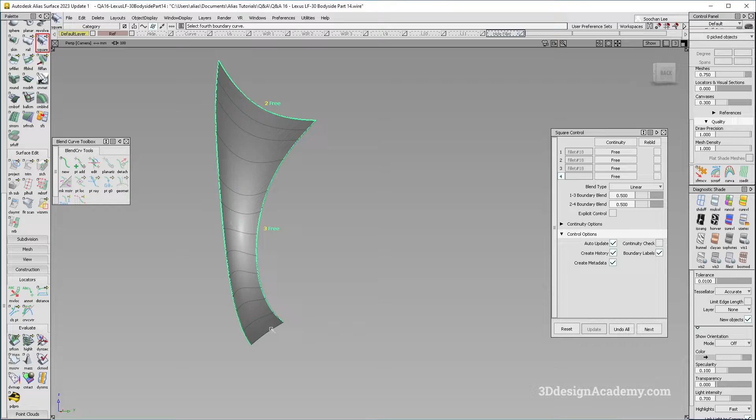Let me show you why. I'm going to try to rebuild this because there's a little bit of zigzag, not quite a twist. Let me reset the tool. I'm going to rebuild with a square, and set 1 to curvature and 3 to curvature as well. You see the CV structure looks like that.

Now, the bigger problem is that in order to clean this up it's going to take a lot of work, and I'll have to manually pull them, which is not ideal. To be honest, a boundary blend, as you can see here, doesn't really help either - it's a pain. Unfortunately, bi-rail doesn't really do much either.

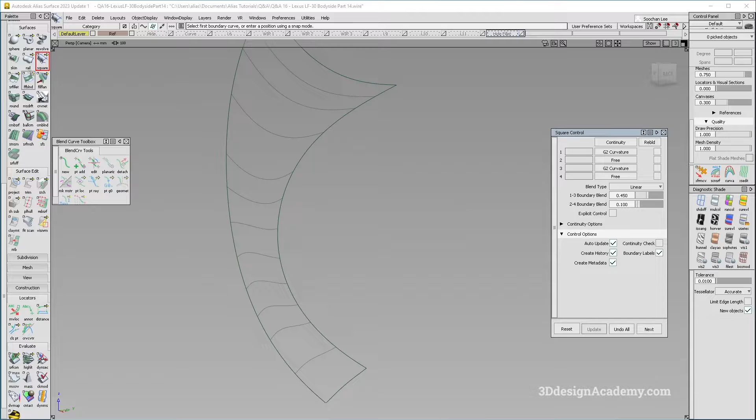If I do a bi-rail, it should be a little bit better. It looks good now, but once I put curvature in here, you'll see that it spreads like this. This is probably the best out of all of them, but it's still not ideal.

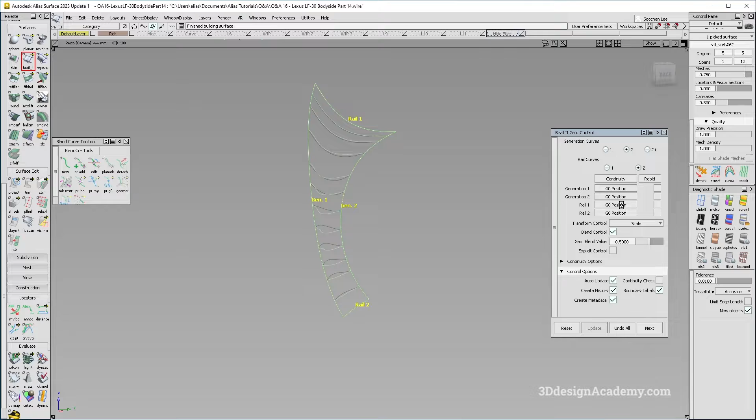Same thing over here. If I pick those as a Gen, I'm going to say Gen 1 is curvature, Gen 2 is curvature, and it looks like this, which isn't exactly ideal.

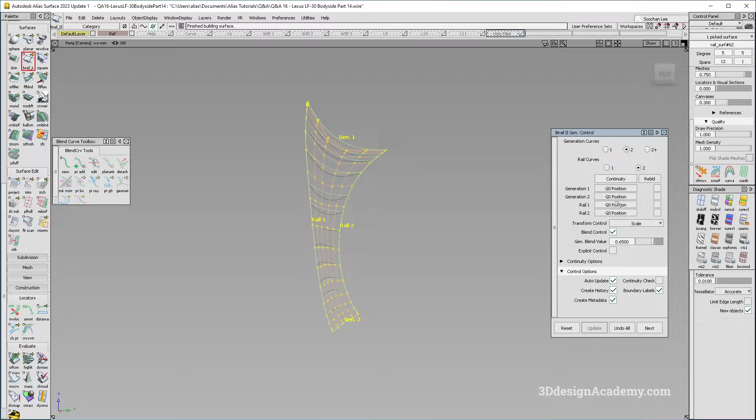Let me see if I can use the gen. blend value to see if it gives me something a little bit better. I'm going to set the rails to curvature and see... nope. Okay, so unfortunately it looks like I'm going to have to use...

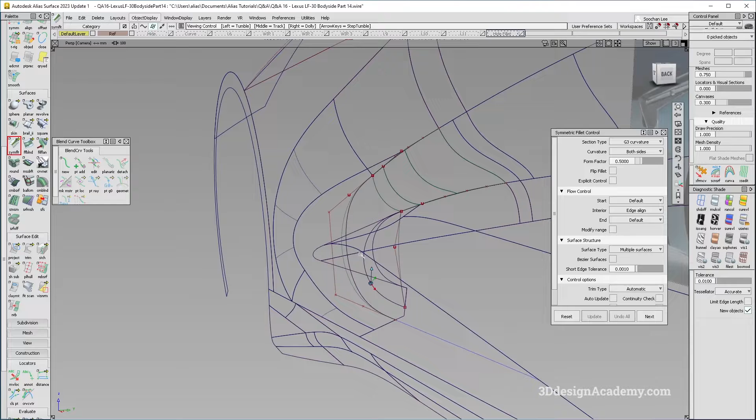So let's do this: I'm going to set this to curvature on both sides, form factor will be 0.5, and I'm going to set everything to default and free like this. I'm going to pick this COS over here and do this one.

Now the problem with this one is, of course, it looks like that, and this doesn't really look good either. Unfortunately, I don't think Bezier is going to work well - it's way too many pieces.

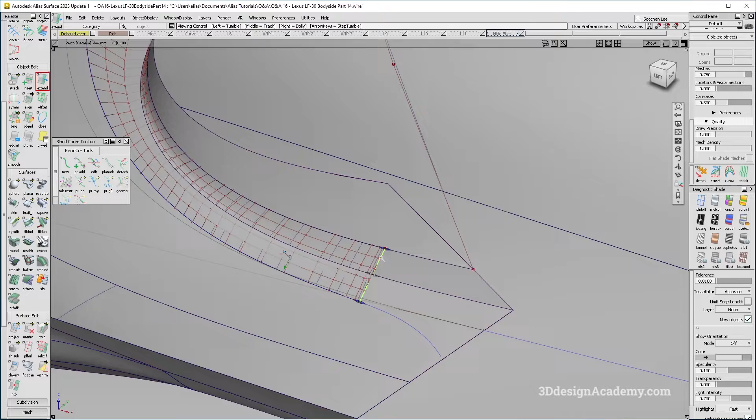So here's what I'm going to do: first I'm going to extend this back, because right now you'll see it's actually going a little bit the weird way. I'll extend that back a little bit, and probably extend this one back a little bit too.

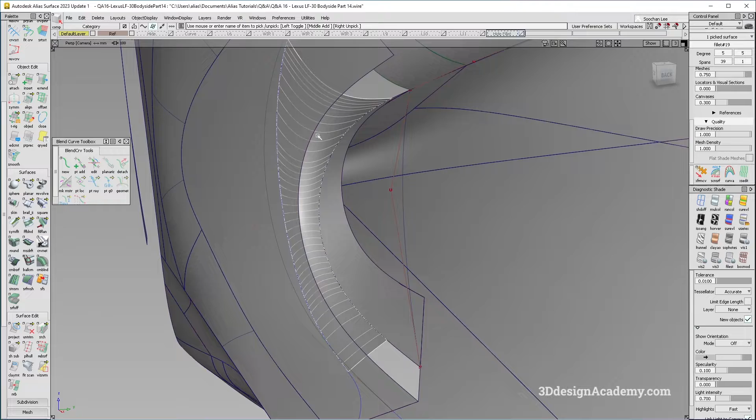Let's see if I can just reduce the number of CVs and number of spans, because right now I think the shape is really good - the only problem is it's just got way too many CVs and way too many spans. Let's see if I can reduce it a little bit.

I'm going to say align, and let's see - obviously position influence twists it. So I'm going to try to reduce the number of spans just this way. Actually, let's do the same thing over here, like this, so that I can do them at the same time.

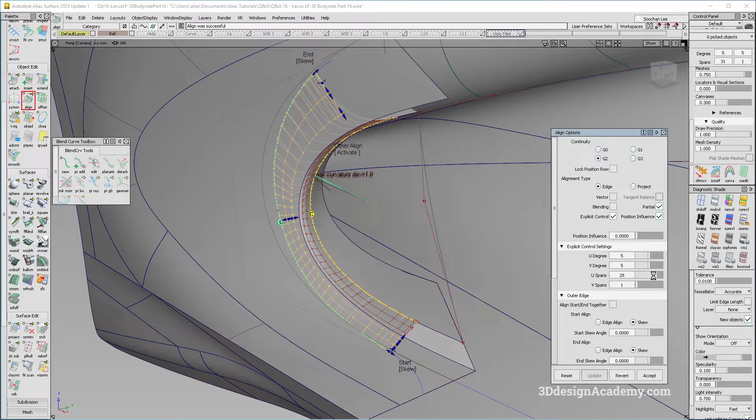Without position influence, I'm going to try to reduce it as much as possible without causing too many problems. Right now I have 21 spans and it's starting to fail position, so I'm going to see if I can just do project instead. There we go, that looks good - so right now I have 21, and it looks like the other side is also failing.

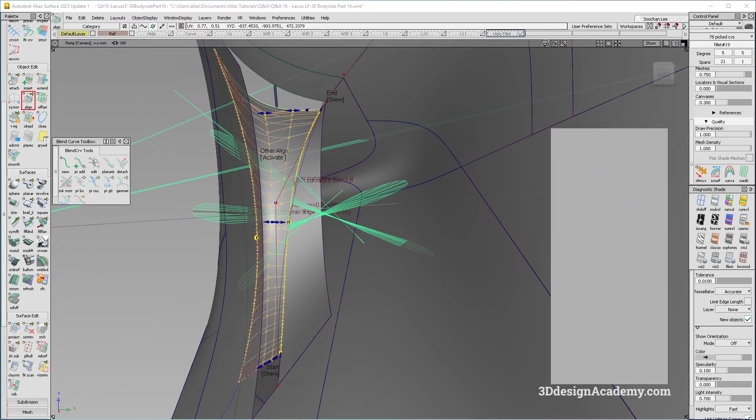Let's see if I can do this one as well. I'm going to say project - is it actually failing position? Let me try normal... oh, Y is no good. Actually, I think normal might be best. Okay.

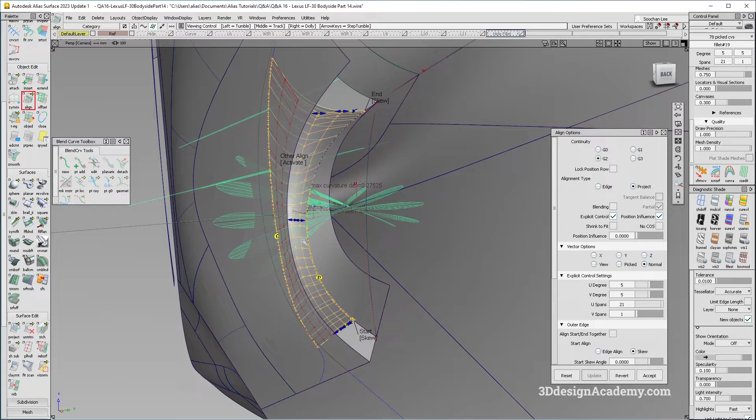Let's see, is it actually failing? I'm going to check. I'm just going to untrim over here and check the continuity. Okay, so it looks like it is failing. I was hoping to reduce it a little bit more, so let's see if I can. What I'm going to do is just reduce it a little bit more. 18 - it's failing, that's unfortunate. Okay, so I would say 10.

Maybe what I could try to do is just reduce the amount of patches over here. Or maybe... okay, so at least this part isn't failing. So let's see, 10, 11, and I'm going to see if I can just align this one.

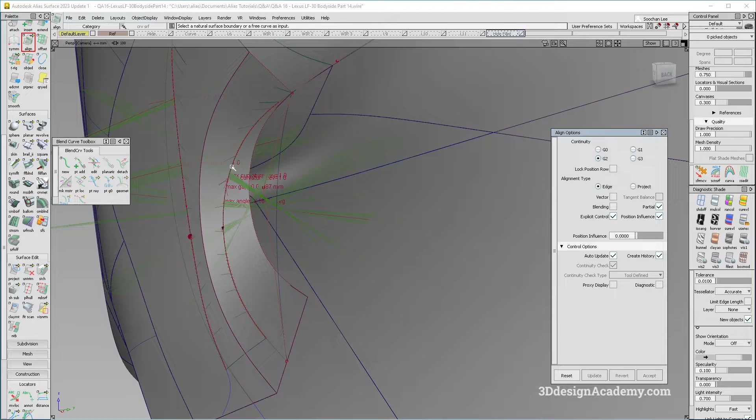What I'm going to do is just say edge over here. Let's take a look. I'm going to grab this one over here. Let's say align. Well, first of all, let's just delete the construction history over here.

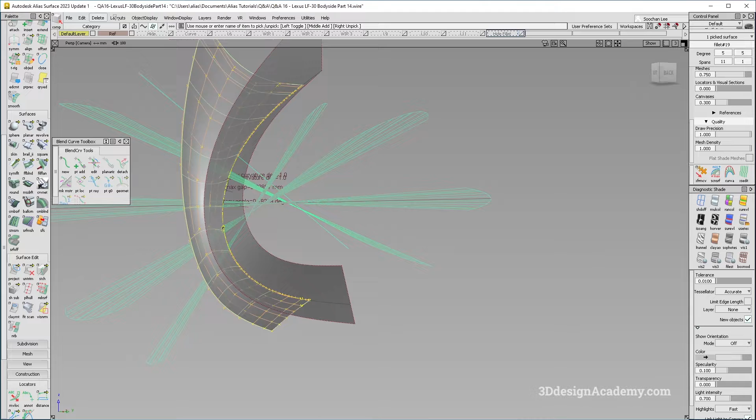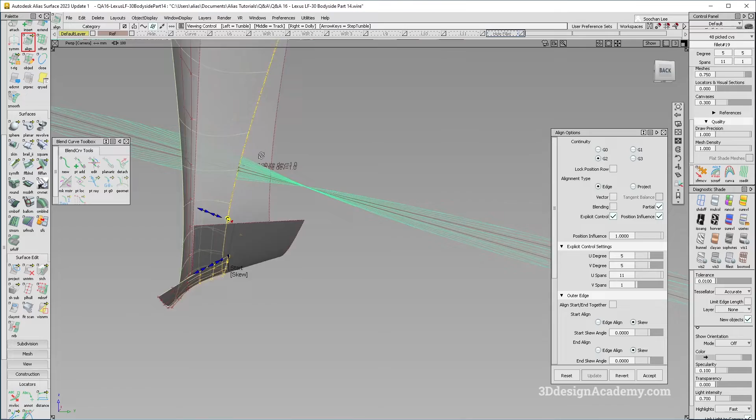I'm just going to align to edge. Well, let's see, okay, so that one doesn't work. Position influence - oh, what do you know? Okay, so I was able to get a little bit something. Now, I did increase the position influence, but yeah, that's actually it. There wasn't a lot of movement, so I don't think I really need to rebuild it. The whole point of this is not to rebuild it because that just ruins the CV structure.

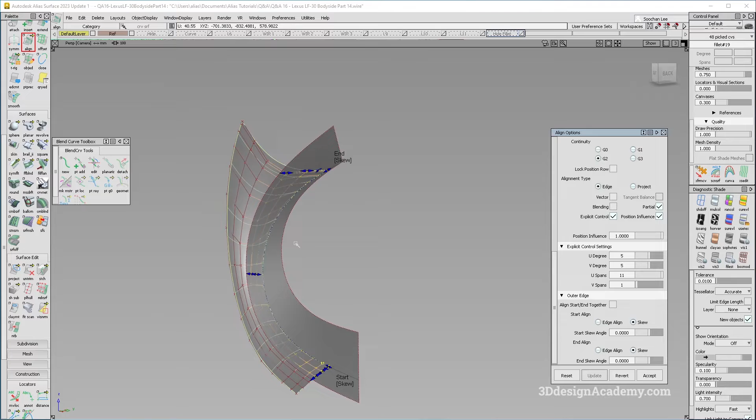So it looks like that worked out quite well. What I'm going to do is... actually the COS I'm going to leave for now. Actually, you know what, let's see. I'm going to do a revert and see if I can just revert to align to G1, and let's just check the continuity over here. Same thing, slight movement in the CV, but nothing major, which is actually perfect.

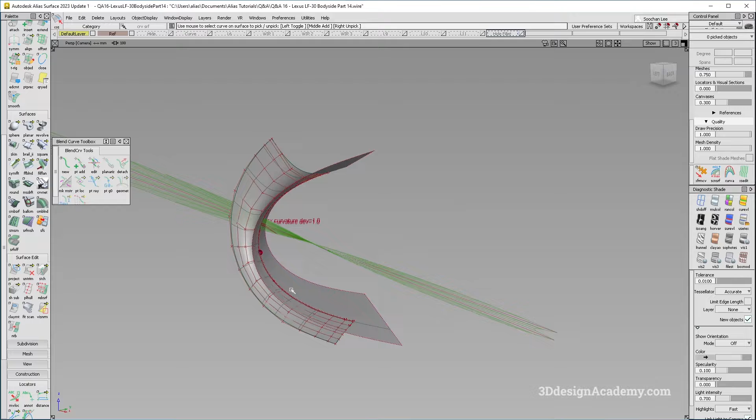Okay, so if that's the case, I'm just going to delete number 2 because I don't need that anymore. I'm just going to make everything visible over here, and everything's looking pretty good. Okay, so now comes the alignment over here. So first of all, this outside one I am actually going to delete, and let's continue with the top first because the bottom should be pretty easy. I think I should probably tackle the more difficult side first before doing anything.

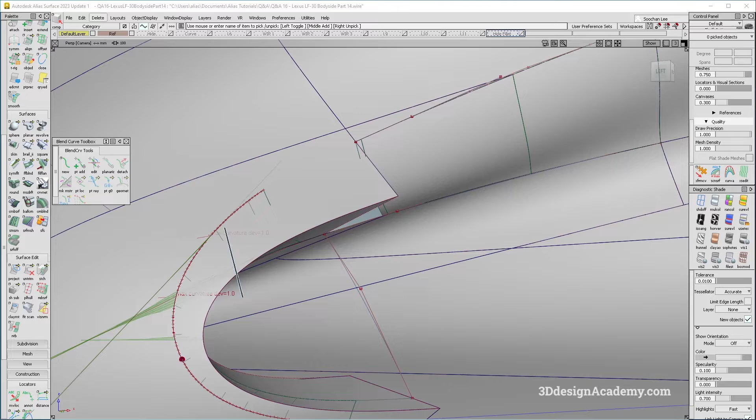So first of all, I believe this is just freeform blend, so let me just change this to default like this, and I'm going to see if the blend over here works well. What I'm going to do is just delete the construction history over here, and actually, you know what, I'll just put it there. I'm going to see if I can do a nice blend between this one. Actually, let's hide that too because I think I'm pretty much done with all the canvases.

Okay, so what I'm going to do is just grab a blend curve, and I'm going to align this one against this edge over here. That's not great, but it's not horrible either.

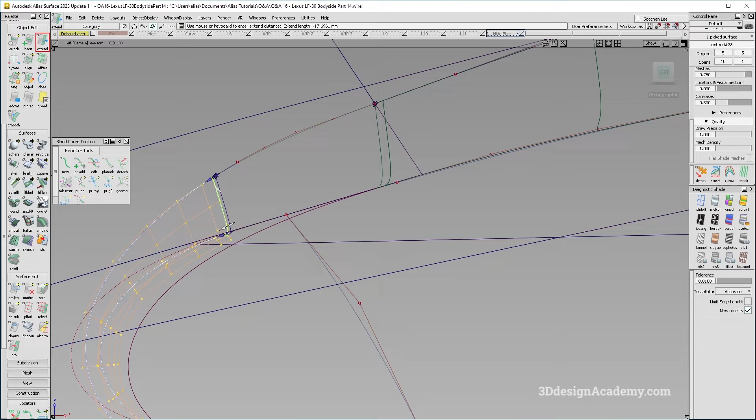I might just, you know what, just in case, I'm going to delete the construction history, copy and paste, delete the construction history so that I have an original. I'm just going to extend this one just a little bit like this so that the CV structure is a little bit more balanced. Since I'm doing that, I might also just get rid of one span. So now it should be a 10 span surface like that, and that's not too bad.

Okay, so let's continue on with this one over here. Since this piece is actually aligned like this, I think I'm just going to get rid of this over here. Actually, you know what, let's do this - freeform blend over here.

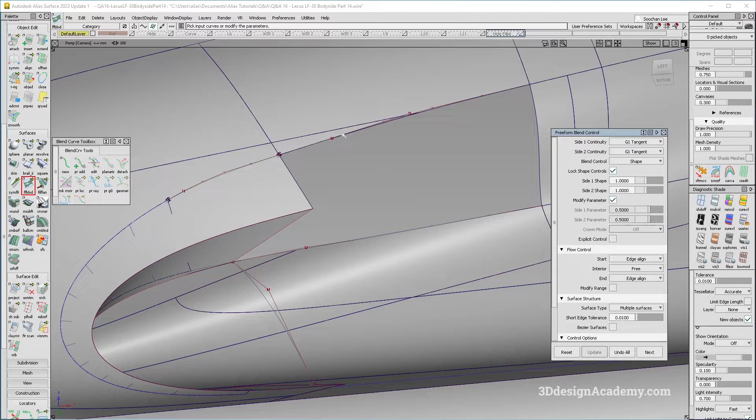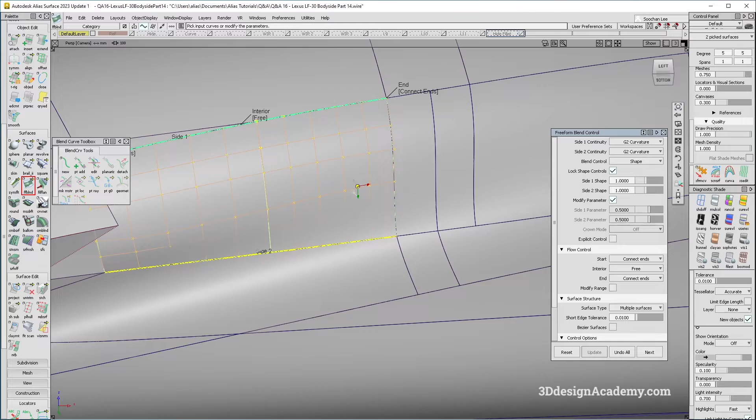So let me just hide all the curves because they're really in the way. I'm just going to hide it in this layer for now, and I'm going to do a freeform blend here and here. And it's going to not be edge align over here, but connect ends. Same thing over here, and of course those should be G2. Okay, so that's that over here.

Now, this is aligned to a fillet, which is actually kind of shrinking, so it might be a little bit ugly over here. Let's take a look - I mean, the highlight's good, but the problem is it's aligned to this one, which might not be ideal for a transition here. So let's take a look at this one.

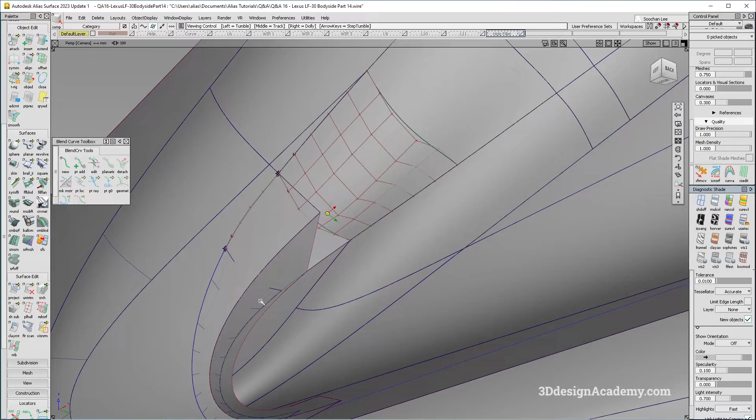Okay, so this piece over here requires 2 transitions over here. So what I'm going to do is, first of all, I'm just going to project this from Y like this. And let's go ahead and do a freeform blend from here to here, and I'm going to do one over here as well.

That one I'm going to say connect ends, and this one default. And that's giving me something like that, which isn't good. But that's okay, I'm just going to copy and paste this. The problem is the COS is reading all the way to here, and that's causing the issue.

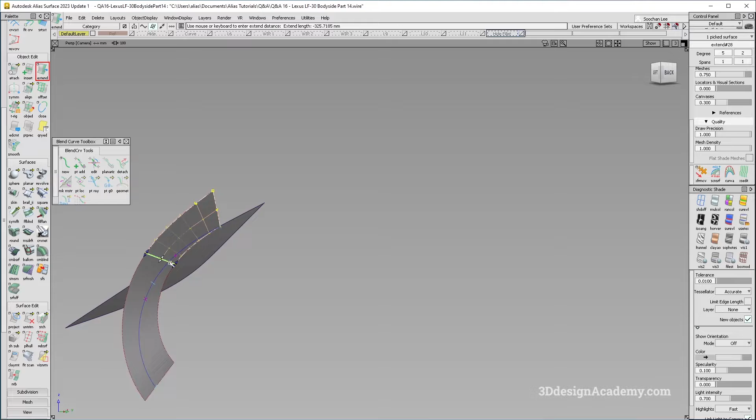So the Alias software doesn't really know where to end and where to start. What I can do is extend this back and use it as a helper surface to get the freeform blend to work a little better. I'm going to grab this edge over here and this one over here, and do connect the ends on both sides, but this one I'm going to reuse a little bit.

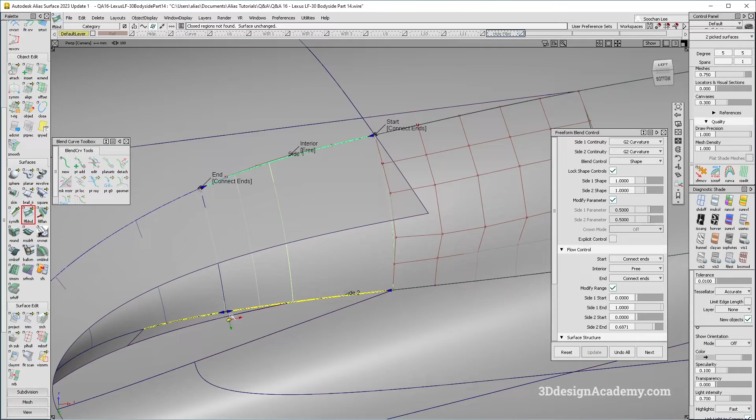So let's do a modify range. I'm going to grab the arrow over here. It doesn't have to be perfect, but it should be somewhat close. Now the problem is this is a surface fillet, and this is actually a symmetry fillet, but it uses similar calculations to a surface fillet I'm sure.

But this freeform blend is shaped, so what I'm going to do is change the form factor, and hopefully this works. Oh, there we go, that's perfect.

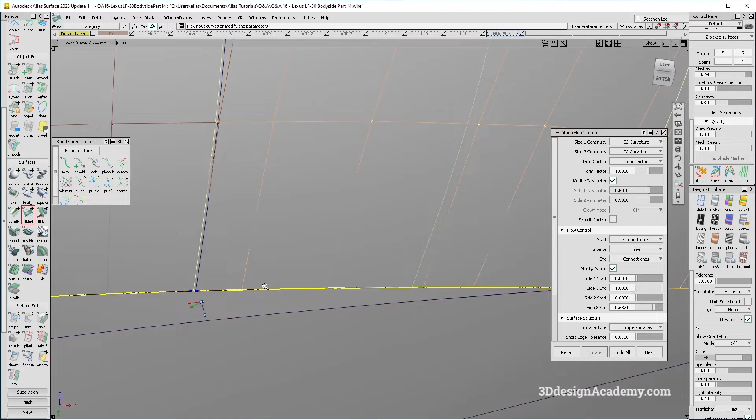Now this side, however, first of all it doesn't fit, so let me get it a little closer like this. What I'm going to do is make it Bezier. Bezier, for some reason, is giving me lots of pieces, but that's okay I think.

Well, I think just keeping this one should be okay, and this one I'll rebuild since I have to match it over here anyways. So let's go ahead and do that. Right now I'm going to do a square, so 1, 2, 3, and 4. This one should be pretty easy, I hope. So that's curvature over there.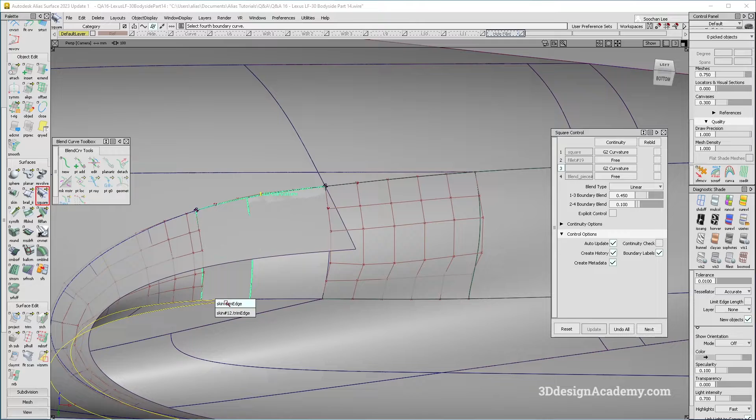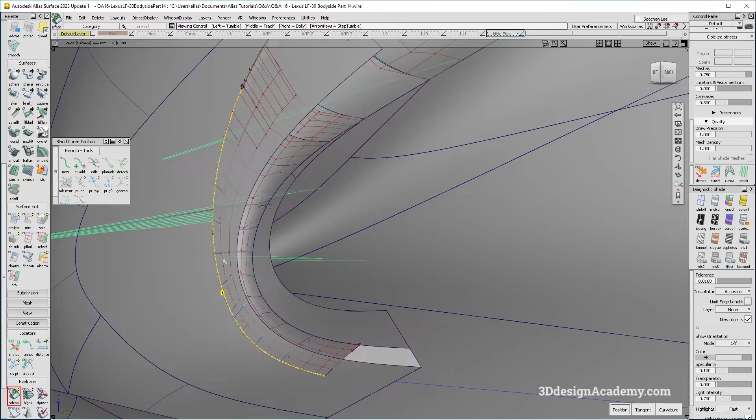Let's go over here, and I'm just going to delete the COS over here and reproject it like this. It's okay, I don't expect to get curvature on this side. You'll see that it's 1.0 all over the place. These are probably actual curvature failures.

To be honest, at this point I'm kind of out of options. I'm not going to bother trying to fix that. Now this one looks like it needs an extension, so I'm going to change this to linear over here with merge off, and do something like that. Now it looks like the projection trajectory is a little off, but that's okay.

I'll fix that later if I ever get to it. Okay, so now I have a square over here. Let's see, first let's do that, explicit control on, going to 5 and 5. And I'm just going to make sure that 2 and 4 is also curvature.

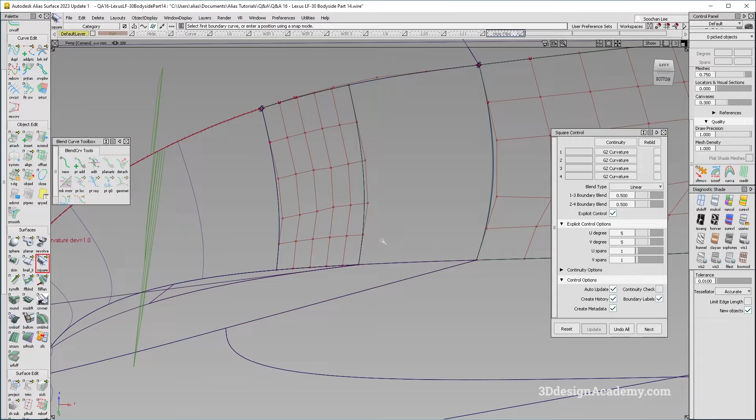And it looks like I'm getting something like this, which isn't exactly ideal. But let's try this, continuity options. As you can see it's got a little weird shape over here, so I'm going to say 2 and 4. Looks like that helps a little bit, not much over here, but that's okay.

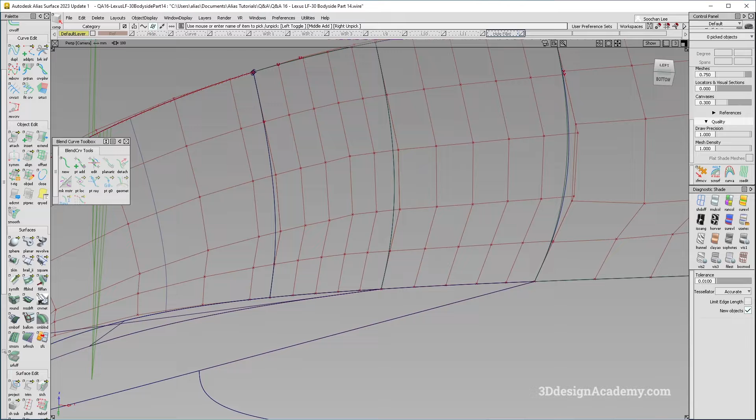Okay, so at least I got curvature on some of the sides, which is giving me hope. That's it, however, this one might need a little adjustment maybe, I'm not sure. Okay, so let's check the continuity over here. Oh wow, that's actually failing by quite a lot.

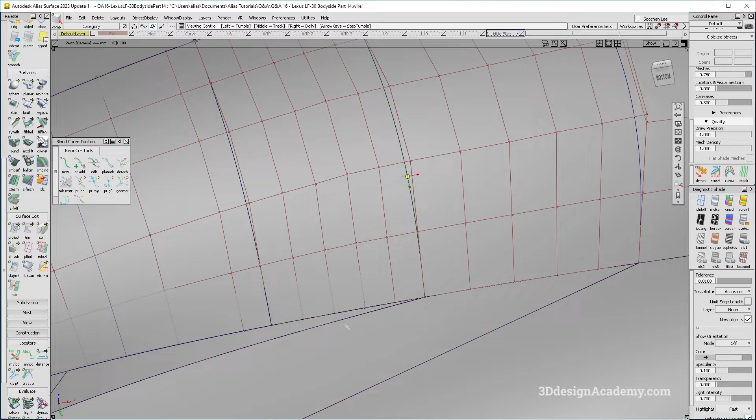The problem with this one is, as you can see over here, this surface is at a very sharp angle compared to this one. So ideally it would need to flow this way, but because I'm trying to do it this way, I think that's causing a bit of a problem.

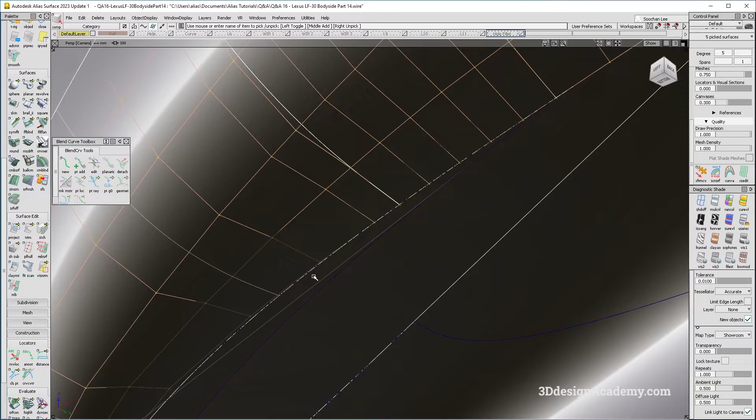So there are a couple of things I can do. I can try to at least make it tangency, but let's isolate these surfaces because it's really hard to look with the surface over here in the way. So I'm just going to isolate these over here like this, and let's see if I can actually align it.

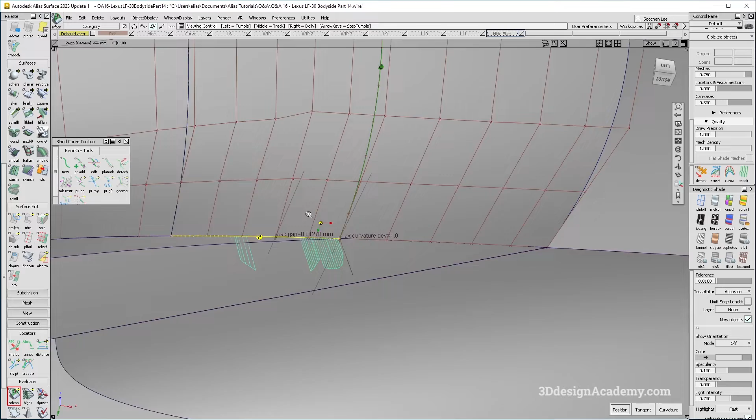So what I'm going to do is first grab align and see if I can align it over here. Yeah, that's not too bad, but of course it needs a little adjustment. Looks like it's actually failing. Oh, actually that's not too bad, so it's failing tangency over here.

But it's actually pretty close, so it's curvature there. Now this one over here, I'm going to probably just make a little adjustment. Actually, you know what, maybe not, because the problem is they are different surfaces. Okay, so maybe I'll try this.

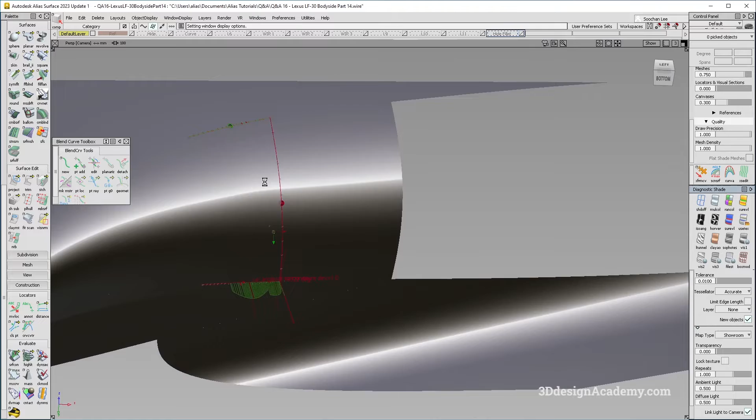So obviously this has a little bit of fluctuation. I don't know how it looks. Actually the highlights are pretty good. And while I'm at it, let me... oh, I can't hide that. Okay, all right.

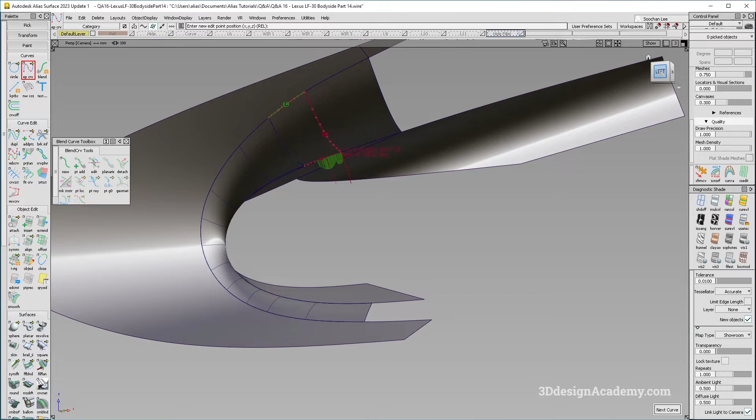Let me just turn those off. I think the highlight might be a little bit off. You know what, let's do this. I'm just going to chop these off, grab a curve over here, project it like this, and trim it so that it's a little easier to look at.

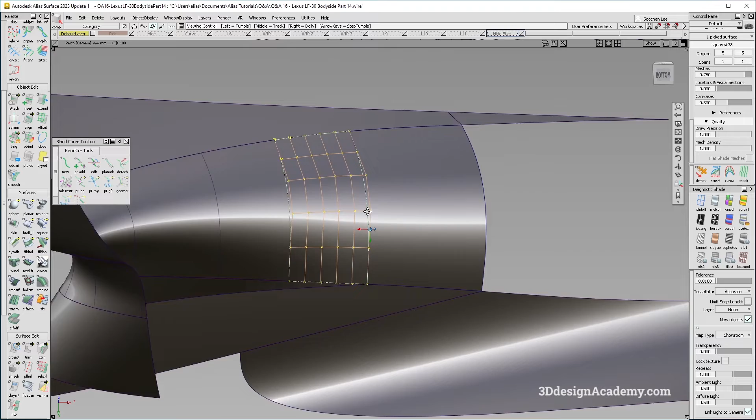As you can see, there's a little bit of a funny thing going on here, but it's actually pretty good for what it is, I think. Of course, there's a little bit of undulation there. So what I'm going to do is make this a little bit smaller, and make this angle a little bit more complementary. See if that works. If it works, great. If not, I'll just go back.

First of all, I'm just going to delete the construction history and just have a copy so that in case I need it, I can grab it. And what I'm going to do is, you know what, let's do this.

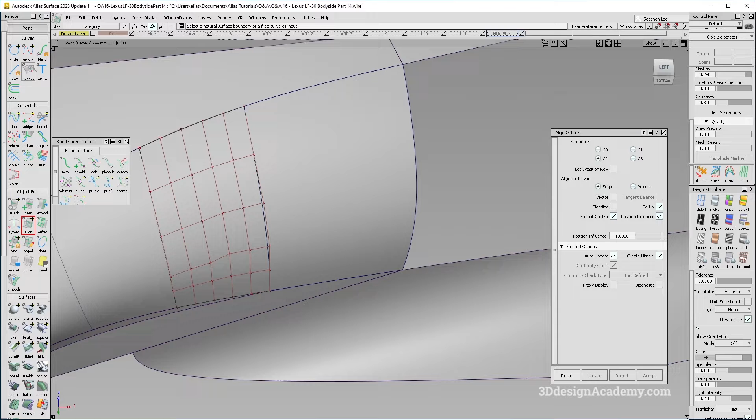I'm just going to snap a curve over here and angle this a little bit over here like this. Actually, it might be better if I just angle it this way. So that does increase the patch size of this, but it also makes the angle a little bit more approachable. Hopefully that'll give me a better result.

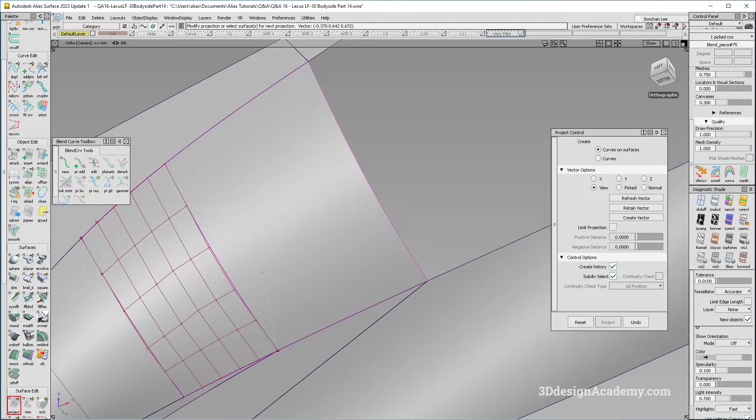So I'm just going to play around with the angle a little bit, and then let's go to orthographic view. That should be better. And I'm just going to project over here. And what I'm going to do is a trim convert on this piece like this. It should be the same. And now I can just delete this one over here.

Let's go ahead and do the square again. So it's going to be 1, 2, 3, and 4 like this. And looks like the shape is already a lot better than before. So that's good. 2 and 4 has a collinear on it.

So there are a couple of things at play here. As you can see, the angle difference is a lot less than before. With the square just by itself, it was about 0.99 or 0.98. But right now it's automatically dropped to 0.3, which is a lot better. And as you can see, the CV structure is a lot better too, which is excellent.

So what I'm going to do is try and align these ones over here and see. Yep, so that's... actually, you know what, if that's the case, I'm going to just leave it in vector normal. So obviously it's got a little bit of tangency failure, but it still dips down. Okay, but still better than before.

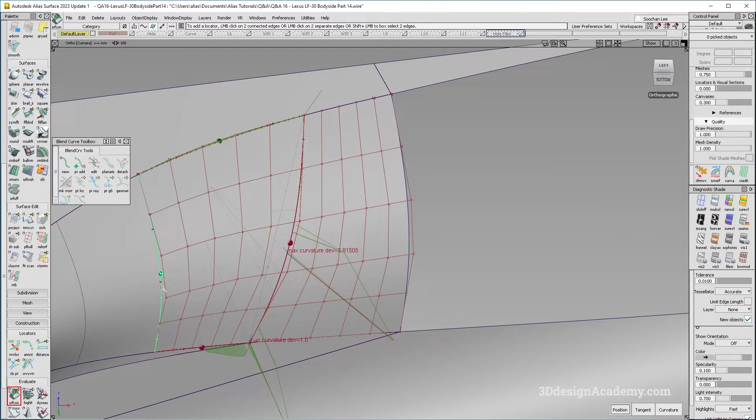So what I'm going to do is see if I can just do tangent over here. Just leave that as is. And I'm going to try and massage it a little bit. Obviously getting a curvature match might be a little far-fetched, but at least I got curvature on two sides. And it looks like it's actually not that bad.

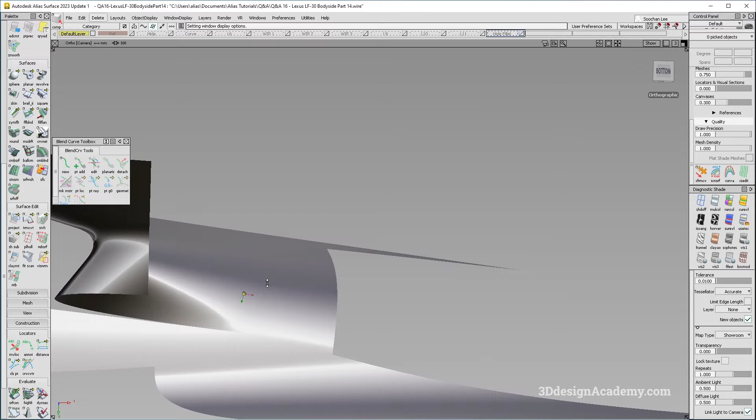Now if the highlight is okay, I'm just going to call it done and move on. Yeah, that's actually pretty good. Now this curvature deviation probably is actually a curvature deviation, but I think I'm just going to leave it. Okay, so construction history, delete that one over there. Nice transition there, so I'm happy with that.

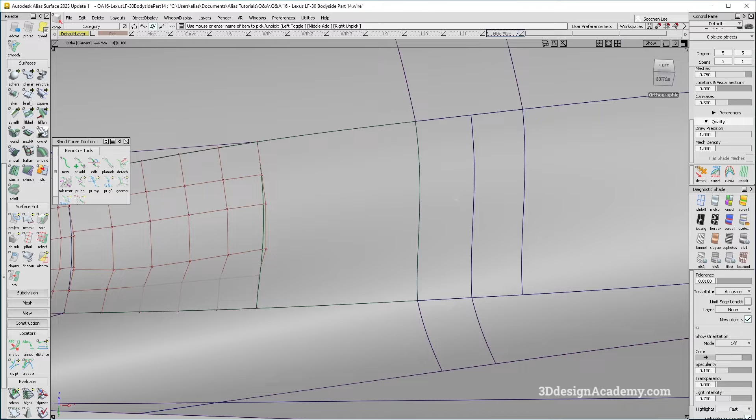So now the only thing I have to do is make sure that this one fits over here. This is going to be challenging, but let's give it a go. So what I'm going to do, well, this is a freeform blend, which means that obviously the structure is a little bit off. So I'm going to have to do a little bit of a transition from this one to this one, and that's going to be a little bit difficult too. But let's see what I can do.

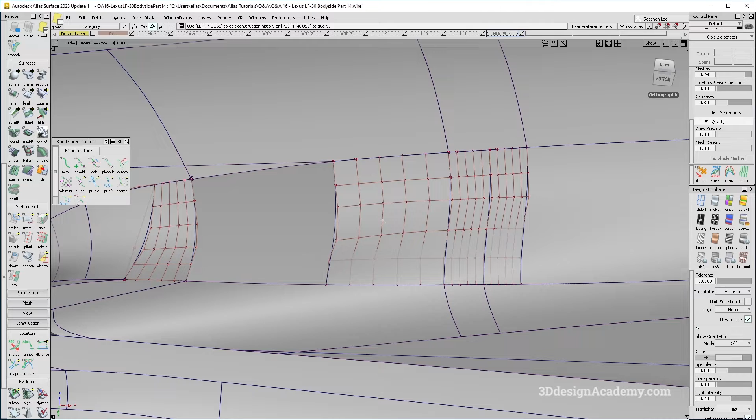First of all, what I'm going to do is I think I'm just going to make a square over here. I might make this a little bit smaller. I'll have to see. So basically this is just a regular freeform blend with a shape control.

Shape instead of form factor, and that's going to create a little bit of difference. So what I'm going to try and do is just try to blend the two with the square over here. Okay, as you can see, it's doing this, so I might have to hand massage this a little bit.

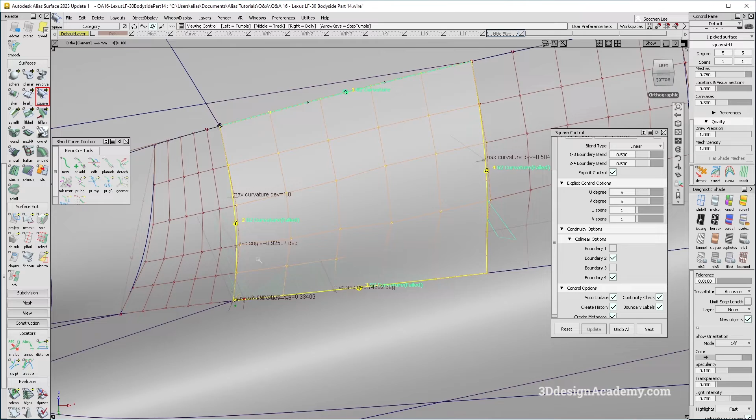So if you see this over here, collinear is on 2 and 4. There's a little tangency failure. The biggest problem is this one, so I think what I'm going to do is I might have to change the angle on this one.

Which means I probably have to redo this one too. But right now, there's quite a lot of angle difference. So let's do this, I'm going to see. I'm just going to hide these for a second, just for a second, and I'm going to do a freeform blend between these two like this.

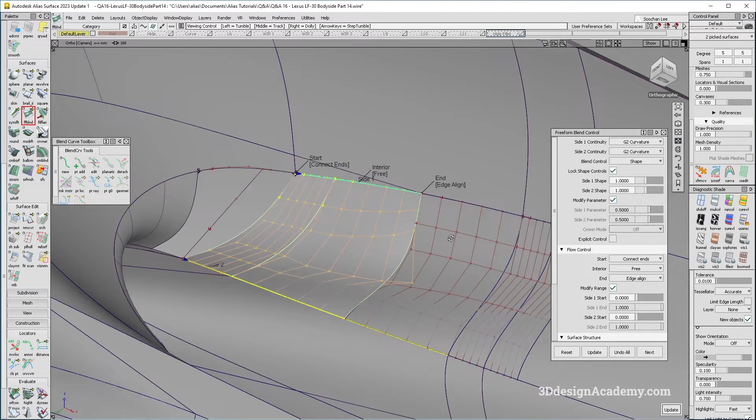Oh, okay, obviously sometimes that doesn't work. So I'm just going to say default over here. Oh, that actually looks terrible. I don't know why it's like this, but let's do this. Let's go ahead and make it like this.

Oh, all right, well what I'm going to try and do is see if it's going to... Oh, okay, so it does create a break. You know what, maybe I'll just have to go through this. Okay, so let's give it a go.

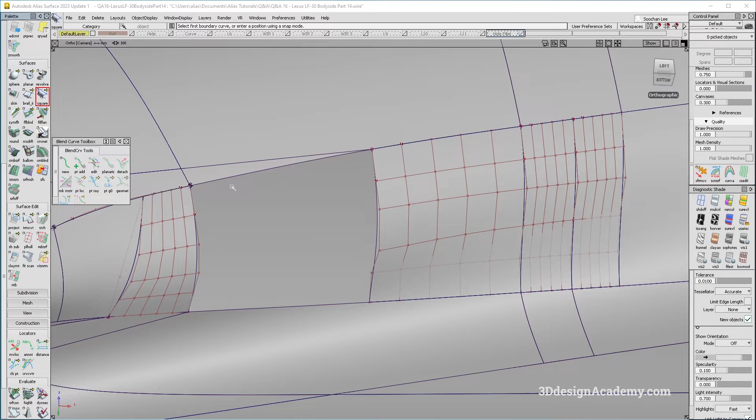So I'm just going to do a square, so it's going to be 1, 2, 3, and 4. Obviously, curvature, it's failing all over the place. Oh, actually, you know what, I have to go the other way. 1, 2, 3, and 4.

Obviously it's failing over here, so I'm going to try and make this a little bit better than how it is. Obviously this is the primary surface, so I'm going to keep that. So I'm going to try to align this one to over here. So let's give that a go.

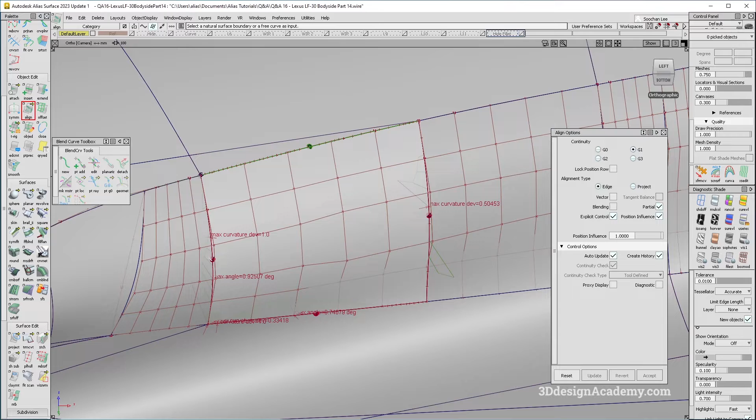So first of all, I'm not even going to attempt to get curvature on this one, because obviously this is an extremely difficult area with lots of surfaces just merging into each other. However, I am going to try and at least get tangency. So I was able to get tangency over here and the CV structure is okay. Let's see if I can at least get tangency over here.

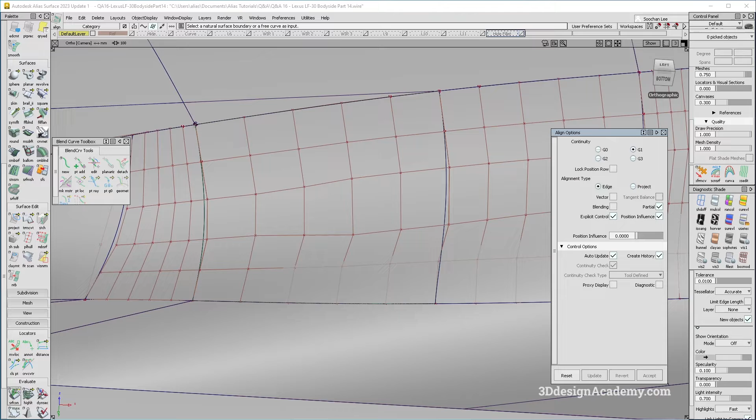Let's see, position influence. Why does it say position failed, but it's not showing me anything? Okay, so if that's the case... Okay, so, oh, what do you know, I was able to get tangency in both.

That's pretty good. Now, I cannot say the same thing. I don't know how the highlight flow is, but at least I got something here. Actually, you know what? I think the highlight's not too bad. I'm kind of surprised by that.

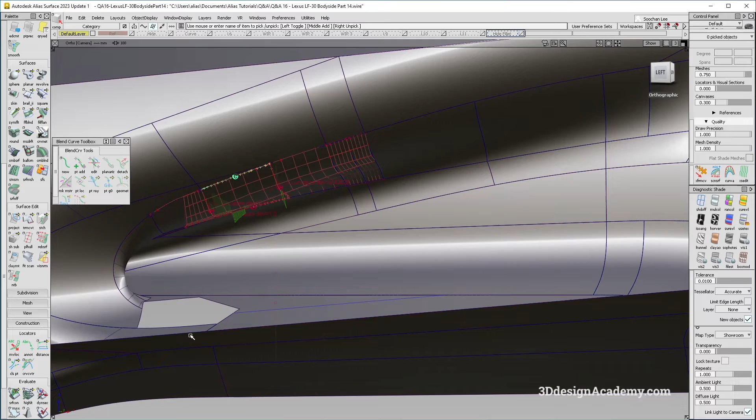So let me just grab these, and these over here. I'm just going to check the highlight, make sure it's good. Now these ones I'm going to do a little bit of transition over here. Actually, that's pretty good.

Oh, what do you know? Okay, so I think I just probably have to do a little bit of CV cleanup here, and I think that's it. All right, that's it. However, let's do this, so I do want to clean the CV up a little bit over here.

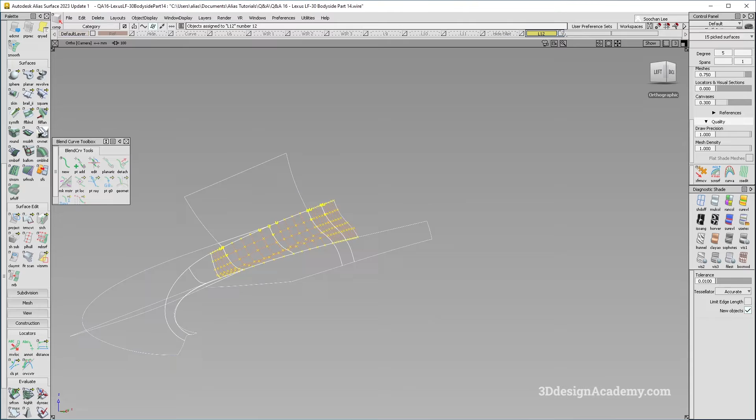So what I'm going to do is, well, first of all, I should make a copy of these. So I'm just going to say copy and paste, delete the construction history, I'm just going to make a new layer and hide over here. All right, and what I'm going to do is, well, actually there are a couple of things you can do.

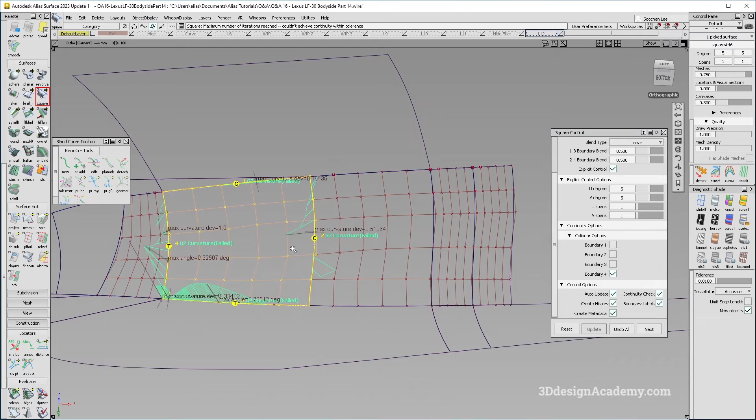I'm just going to delete that and I'm just going to do a square again, so it's going to be 1, 2, 3, and 4. But instead of having collinear here on side 2, I'm just going to turn that off. Oh, still, you know what? Okay, never mind, let's do it again. So it's going to be 1, 2, 3, and 4.

Collinear, I will turn it on at 2, so that's curvature there. Now it looks like tangents, getting tangency is not too bad. And what I'm going to do over here is I'm just going to just line this up. So I'm just going to say curvature over here, and I'm going to say curvature over here.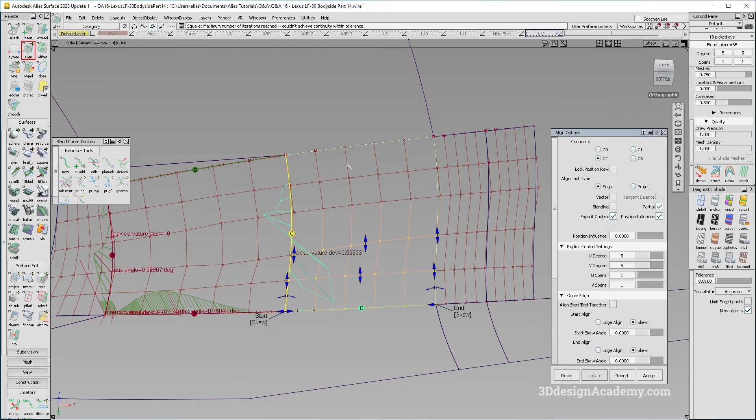I'm just going to massage the CVs a little bit. So, auto scale G2, I think that actually needs to be turned off. And I'm going to have to grab a couple more surfaces over here. So I'm going to grab this one and just this one, just in case. Okay, so that looks, everything looks pretty good.

I'm just going to push this one just a little bit down like that over here, and that's better. And what I'm going to do is, I think this one maybe just a little bit. I'm just going to push this one just a little bit like that over here so that the CV structure is good. Now, of course, that probably means that these are going to be broken, so I do need to fix this.

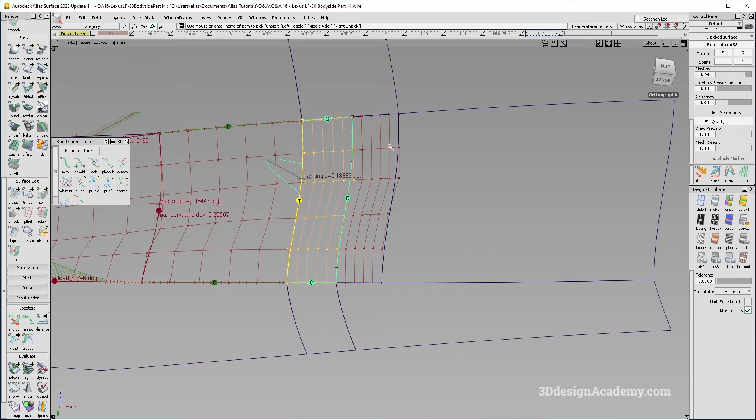But this one should be pretty easy. So what I'm going to do, well, first of all, it's not too bad over here. Just in case, I'm going to delete this one, and I'm going to connect the two using freeform blend, and it should be okay.

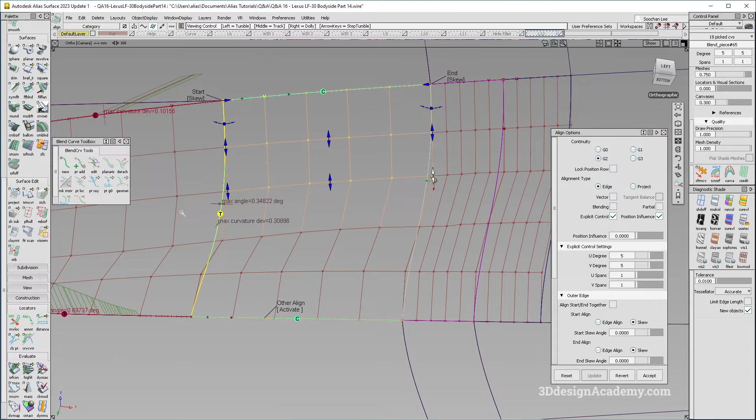Now, of course, it looks like it needs a little bit of refinement over here, so let's just massage that a little bit. And it looks like this one going down has a little bit of effect, so let me push this down just a little bit. There we go. Make sure I don't have a zigzag all over the place.

Do the same thing over here, I'll push that one a little bit. That one's not too bad. Of course, there's going to be areas where it looks a little bit funky, but I'm not going to be able to set it perfect for all sides, so I'm just going to do that.

Actually, you know what, maybe I can just push that back down. There we go, I think that might be a little bit better. Okay, so let's do an adjustment here. I'm not going to be able to get the zigzag out of everything, but at least it's a little bit better than before. Let me just push this one over here a little bit.

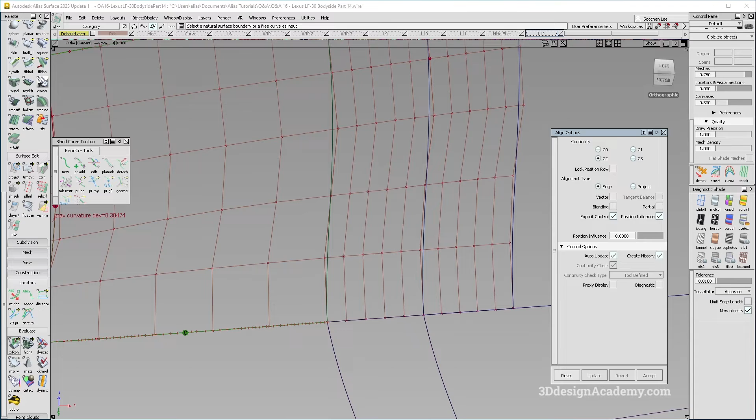Like that, and that's looking good. Now I do need to check to make sure that it's curvature over here. Oh, okay, so let me just make the edge align. There we go, and this is also going to be edge align.

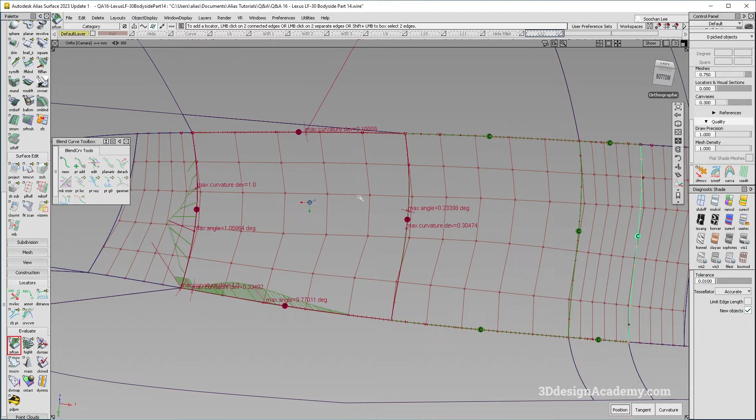So obviously, freeform blend being a tool to align two edges, these sides are going to be curvature. I was able to get curvature over here as well. Now I don't know why this is failing. Curvature all sides. Okay, so let's actually try to get the continuity to be correct.

I'm just going to delete the construction history over here, and let's try to actually match the continuity. So that's curvature there, and for this side I'm probably just going to do tangent, but well, let's see how it does. Okay, so I would say vector, because it's failing over here.

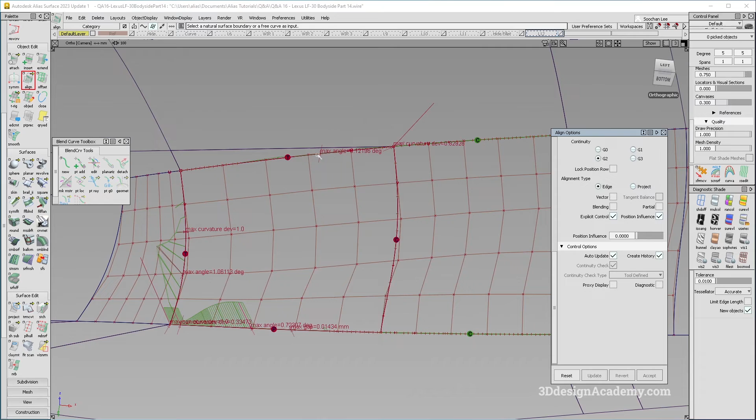Looks like that's failing. Okay, so it's just going back and forth. That's okay, so let's try to get tangency over here, and I'm going to get tangency over here, partial, position influence set to max. Why is it failing?

I don't know why it says failing position, but let's take a look. Oh, that could be because it's all the way there. Surface continuity, okay, so I got tangency there. And hopefully I can get tangency here. And there it is, okay, obviously curvature.

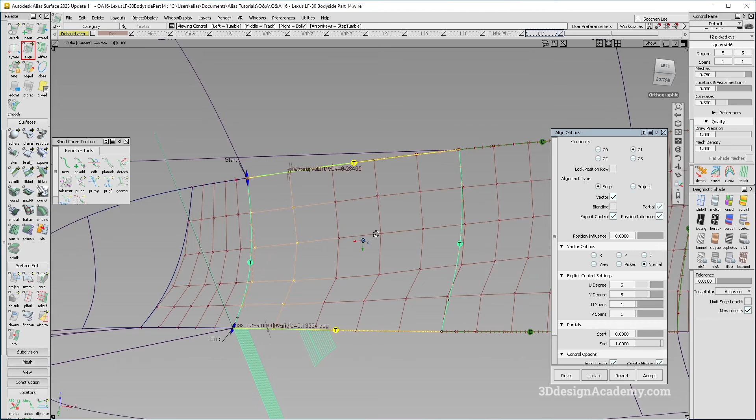Okay, so it looks like vector will need to be turned off. The problem is I'll have to, let's just do G2 over here. I think that looks a little bit better. However, I'm going to try, well first of all I do need to make sure that this is tangent over here, and I'm just going to push this CV around.

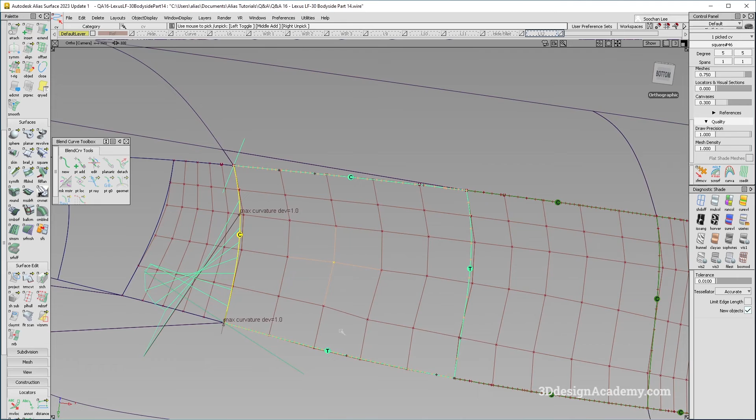Vector, looks like vector is a little bit better. I'm just going to push this down over here. Let's do a slide. Actually, you know what, I think this time I'm going to actually grab this side, just make it...

Somewhat looking good on all views. So let's snap it to 50, mouse sensitivity, change that. Okay, so hopefully it doesn't look horrible. At least the CV structure seems okay.

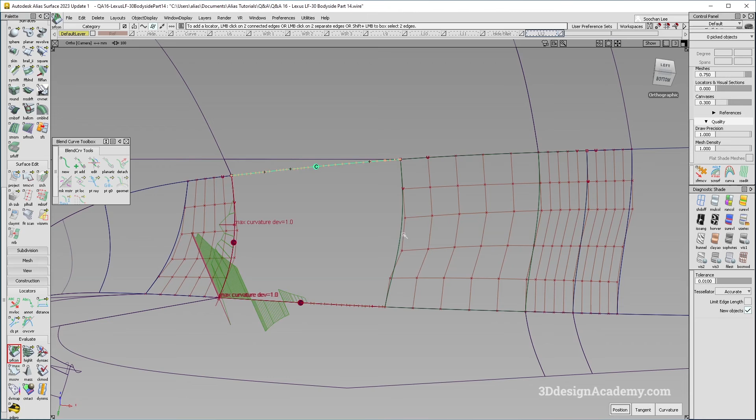It's not perfect, to be honest, not by any means. Okay, so I got tangency there, curvature is of course failing. 1.0, to be honest, 1.0 is actually irrelevant because that's probably the max. So I'm pretty sure it actually has a curvature failure, but it looks like the highlight is actually pretty decent for what it is, so I would say that's a pass, and I'm going to move on.

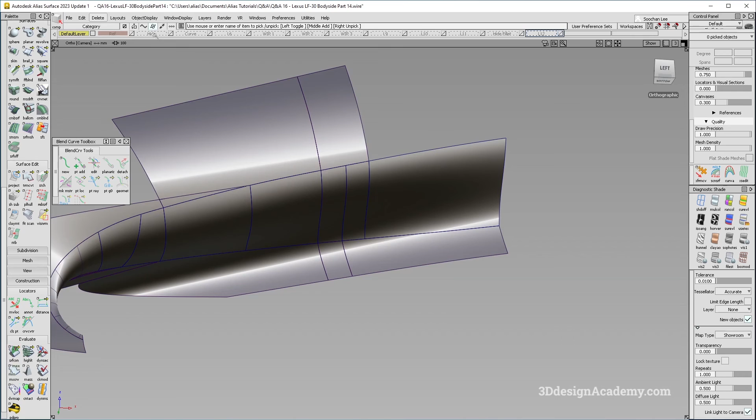Right, so I'm just going to delete the construction history over here like this, and let's see how the whole thing looks. Yeah, that's actually pretty nice for what it is, especially for what it is. Okay, so looking pretty good. All right, so still a couple things to do. I do need to finish this up, and I probably need to just clean this up a little bit.